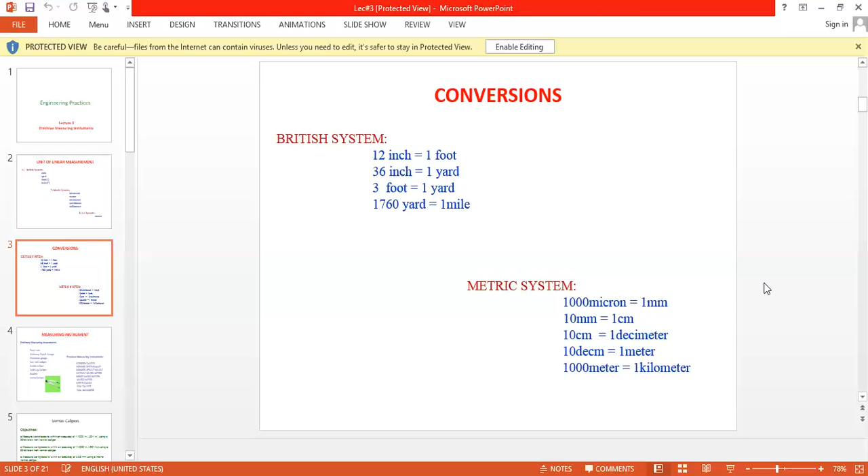Ordinary measuring instrument, we have already discussed some of them, like steel rule, ordinary depth gauge, protractor gauge, outside caliper. If we want to measure the dimension from the outside, then we use outside caliper. And if we want to measure the dimension from inside of some circular edge or any part, we use inside caliper or odd leg caliper, divider, Jenny caliper.

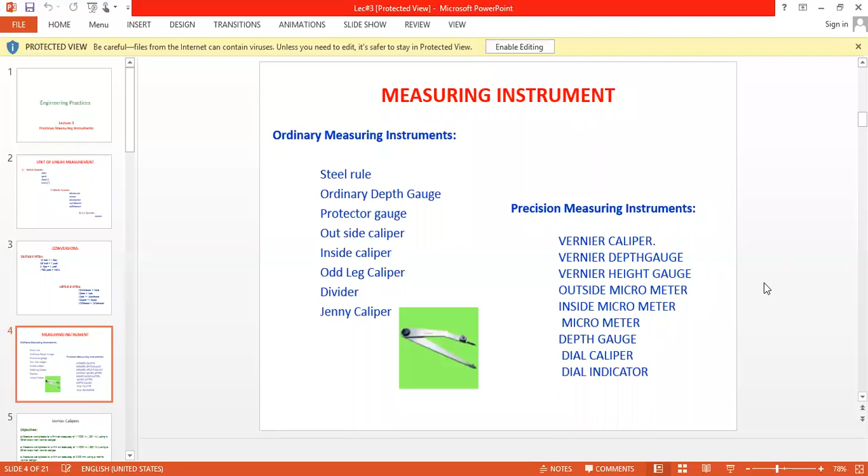What precision measuring instruments are? Vernier caliper, vernier depth gauge, vernier height gauge, outside micrometer, inside micrometer, micrometer depth gauge, dial caliper and dial indicator. Okay, vernier caliper. What is vernier caliper and what is the objective? Why are we studying vernier caliper?

Measure my workpiece to within an accuracy of 1/1000 inch or 0.001 inch using a 25 division inch vernier caliper. When we use 25 division inch vernier caliper, it can measure up to 1/1000 part. Measure workpiece to within an accuracy of 1/1000 using a 50 division inch vernier caliper.

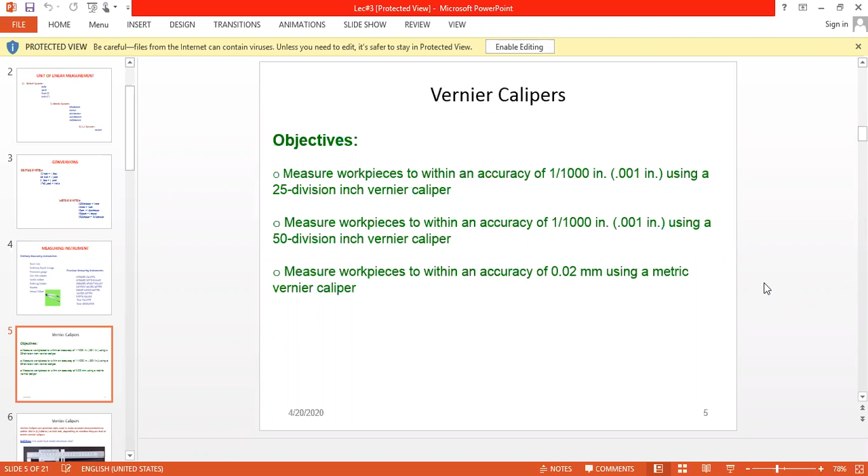These are the calipers on which there are different kinds of division. Like for 25 division, there is a different way, and for 50 division, there is a different way. Measure workpiece to within accuracy of 0.02 millimeter using a metric vernier caliper. This is the vernier caliper. Vernier calipers are precision tools.

What is the difference between precision and accuracy? Accuracy is how close the measured value is to the actual value. This is accuracy. And what is precision? Precision is basically how close the measured value is to the previous measured value.

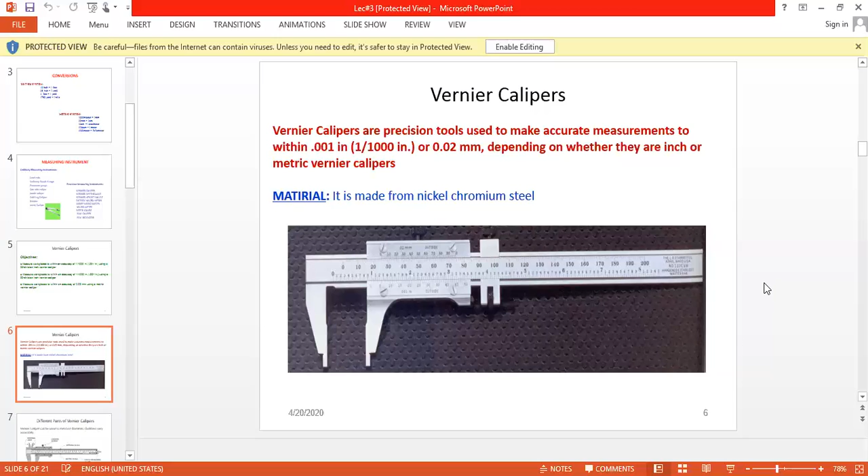Vernier calipers are precision tools used to make accurate measurement to within 0.001 inch or 1/1000 inch or 0.02 millimeter, depending upon whether they are inch or metric. There are different cases. First of all, we must know what is the material. It is made from nickel chromium steel. Okay, these are the parts of vernier caliper. Vernier caliper can be used to measure diameter and thickness very accurately of very small things.

These are the parts of a vernier caliper. These are internal jaws. These are external jaws. This is a locking screw. For example, we can open it and this will move towards right, and then we will close it, it will move towards left. When we open it, put something here, then we close it and fix it, and we will measure the value. That we will look at later on. Now, for the time being, concentrate on the parts.

It consists of internal jaws, external jaws. This is a locking screw. We can open it, fix the part, close it, and this is the scale marking. This is a metric scale. Downward, it is a metric scale, and upward, it is an imperial scale. And this is a depth measuring blade. If we want to measure the depth, we can use this. We will study later on how we will use vernier caliper to measure diameter and thickness very accurately.

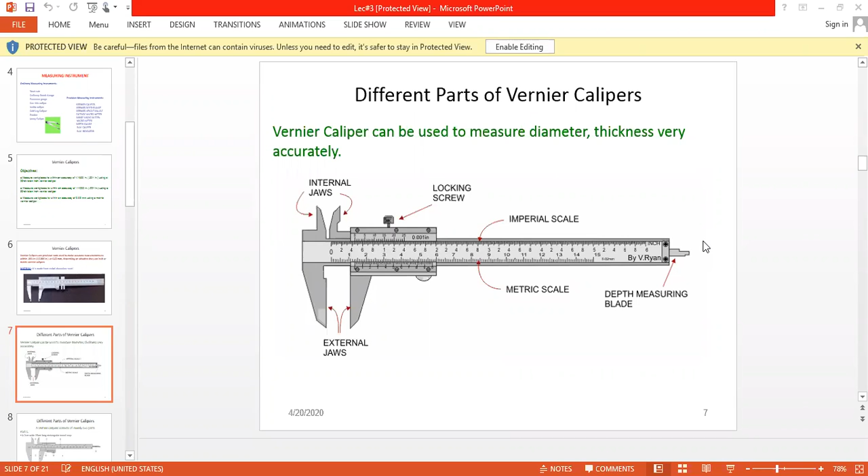Okay, a vernier caliper consists of mainly two parts. Part 1, a 2 centimeter wide, 15 centimeter long rectangular metal strip. This is the metal strip. This is 2 centimeter wide and 15 centimeter long. The left end bottom side of the strip consists of a fixed jaw like this. These are fixed jaws, and at the same end, at the top of the strip, these are fixed jaws, like 1 and 2. These are fixed jaws.

On the strip, a scale 5 is graduated in inches. Along the upper edge, another scale 4 is graduated in centimeters. These upper markings are in inches and lower markings are in centimeters along the lower edge. These are in centimeters. This is called the main scale S. This is the main scale.

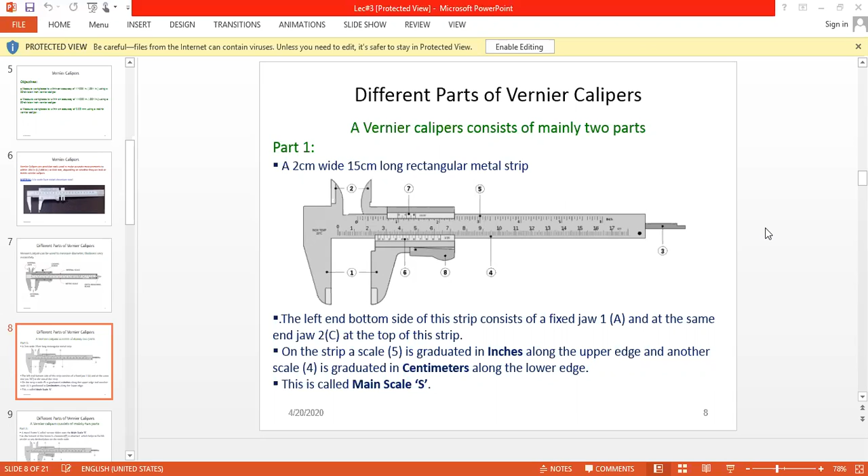Okay, part 2. Vernier caliper consists of mainly two parts. Main scale we have studied, and now a metal frame V called vernier slides over the main scale S. This slides on the main scale. This part moves to the right side and left side. This is the main scale. At the bottom of this frame V, a button marked P is attached, which helps to fix this vernier at any desired place on the main scale.

This is used to fix the... The sound is cutting, sir. This video is being recorded and I can share it with you on the YouTube channel, so you can just hear it. I can share it with you. Oh, okay.

Which helps to fix the vernier at any desired place on the main scale. This point is used to fix it on the main scale. This vernier frame consists of jaws 1B at the bottom, jaws 2D at the top, like this, these are the jaws.

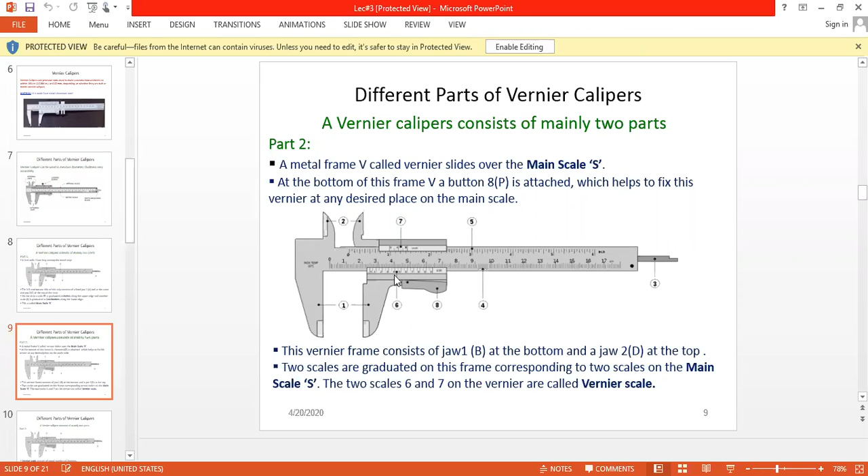Two scales are graduated on this frame corresponding to two scales on the main scale S. The two scales 6 and 7 on the vernier are called the vernier scale. These upper ones are in inches. And these are in which system? We have already studied that these are in metric, and these are the scales with which we can measure, which we will study later on, how we will use this to measure the diameter in small dimensions.

Vernier scale consists of equal number of divisions. This is the vernier scale. This consists of equal number of divisions. This is the main scale. When we move the vernier frame over the main scale, a thin strip C will be projected out. This will be projected out when we run the vernier scale on the main scale. The projection will be exactly equal to the distance between the jaws. This distance and this distance will be equal.

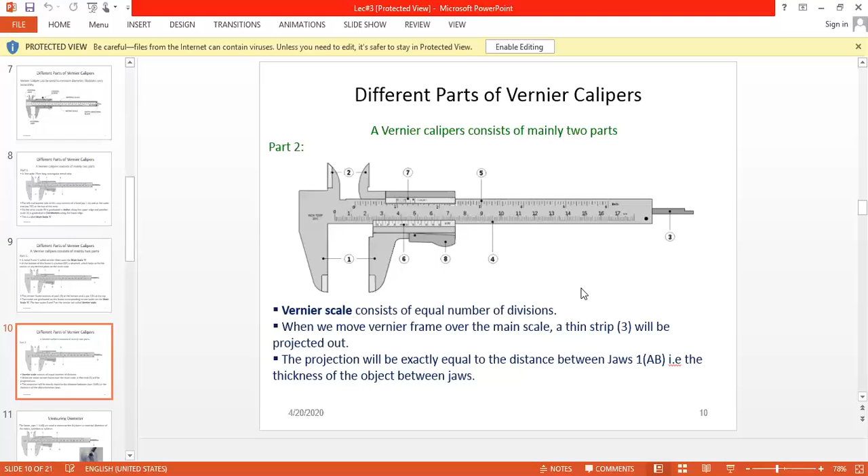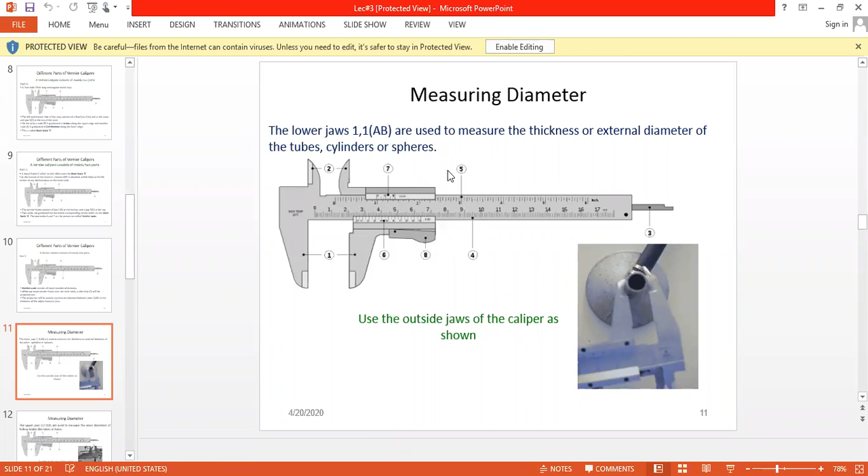The lower jaws 1 and 1, these two, AB, are used to measure the thickness or external diameter. Their shape shows that they are used to measure the external diameter. Look at this diagram, they are used to measure the external diameter of a tube, cylinder or sphere. External jaws are used to measure.

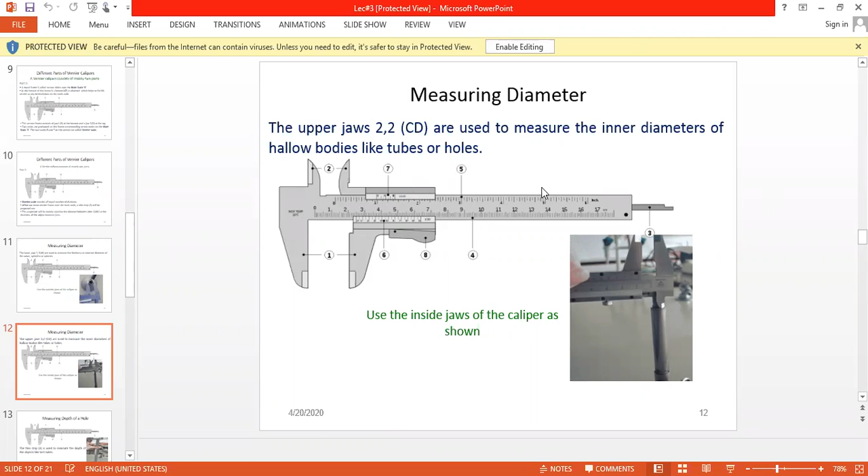Okay. Use the inside jaws of the caliper as shown. These upper jaws are used to measure the inner diameter. Their shape shows that they are used to measure the inner diameter. Look at this diagram. They are used to measure the inner diameter of hollow bodies like tubes or holes.

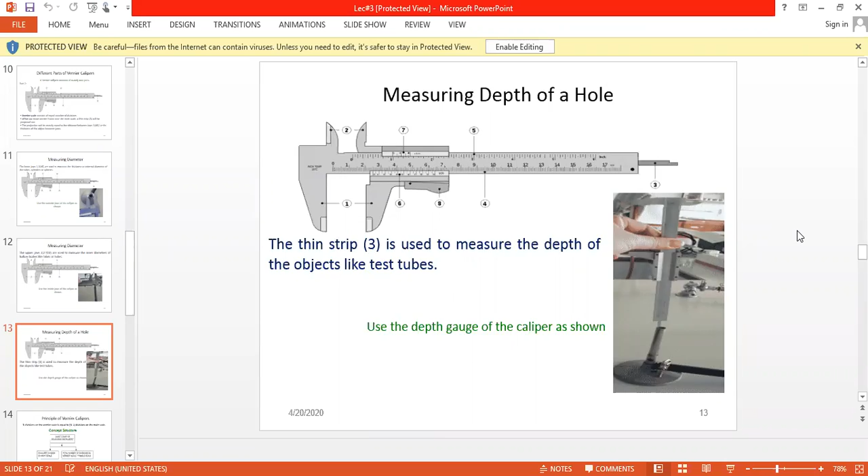If we want to measure the depth of a hole, the thin strip 3 is used to measure the depth of an object like a test tube or something else. Principle of vernier caliper.